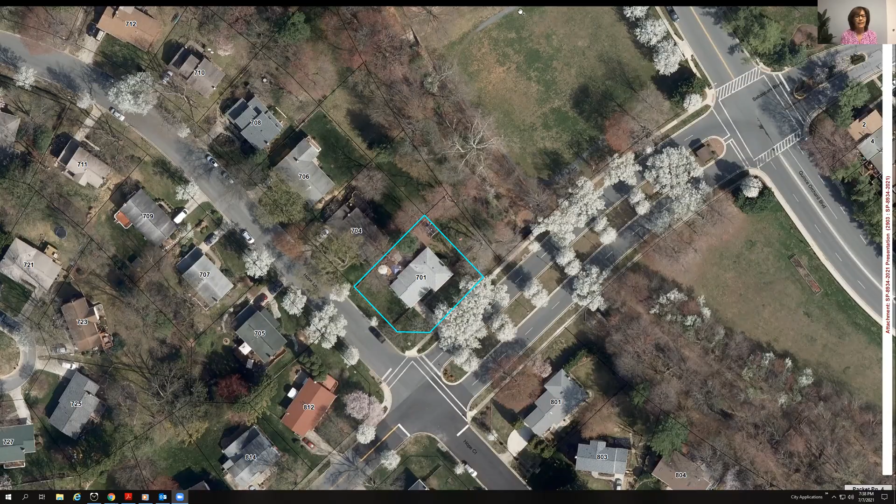And because the applicant is increasing the number of stories on the property. You can see on the aerial, this is a corner lot. It's 701 Hope Lane, but it actually faces Diamond Drive, which is the 4-lane road with the trees. The applicants are adding a 690 square foot addition to the home. It is required under section 24-168A that this go to the Planning Commission because of the additional story to the structure. So the applicant, Ana Mirzaei of Manzel Construction, is here, I hope. I'll turn it over to her and let her introduce it.

Okay, great, thank you. I don't see her. Good afternoon, this is Gene Brown and Brooke Bernal. We're the homeowners. I know Anna's participating, but I don't see her right now. Okay, as Caroline said, first I'm going to say I'm Gene Brown, this is Brooke Bernal, the homeowners, and I want to thank you for your time this evening. I wanted to ask if everybody had the opportunity to look at the site plan documents that were presented.

Sure did. Perfect. As Caroline said, it's 690 square feet. Brooke and I've been here for 4 years, she's been here for about 10, and we have a full house. Quite honestly, she has 2 girls, 11 and 16, or 12 and 16, and my daughter is going to be moving in with us, who's 14 years old. So it's going to be quite full, which is what pushed the requirement of why we wanted to increase the living space of our house.

And primarily the decision had to do with, we love this neighborhood, we really do, and we didn't want to sell and go somewhere else. So the obvious answer was to request permission to add a story to our current split level home, which would be adding a master bathroom, bedroom, small laundry room, closet space, and office space.

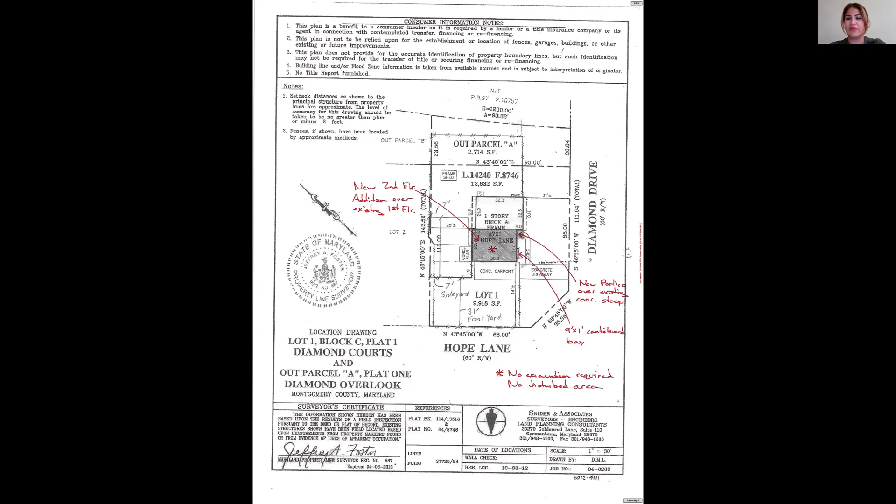And you want to go to the next page? Go ahead and go through the presentation as you describe this, I know you've got some elevations and some plans to back that up. Yes, so if we can go to the next page.

So we can go to the next page. The addition spans throughout from the full front of the house to the back of the house, but not over the carport. So there will be windows on the side of the carport. I think that might be in the next slide that you can see there.

If you go to the next page, please. So you see in the front, what we've done to kind of keep with the style of the house is we're adding a little bump out in the front for the windows to make it more unified. And in the back, the windows are pretty minimal, just to allow for light, but to also provide privacy since it's going to be a master bedroom.

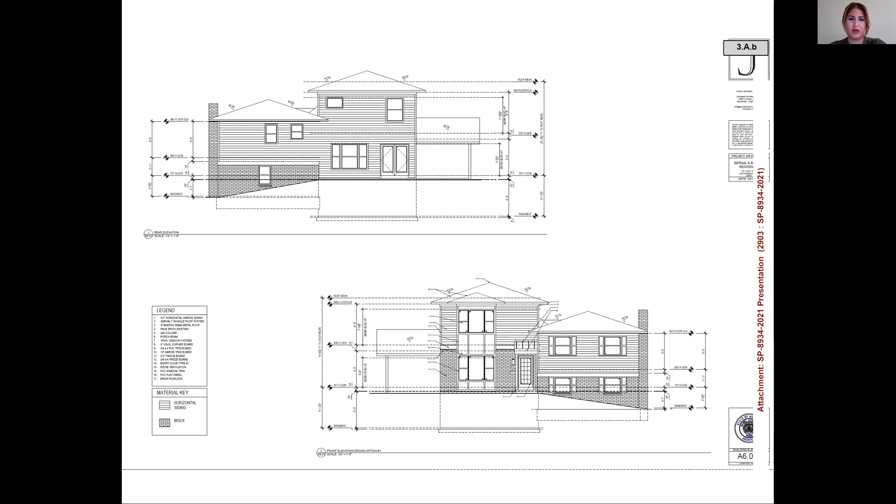On the next page, I believe you will see that there's 2 small windows on the side, and you can see where the existing pitch is for the roof of the carport. Next page.

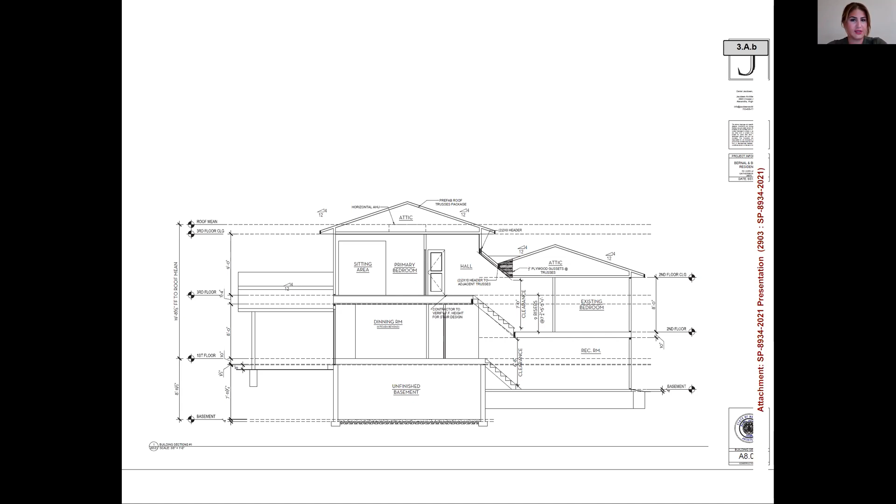Next slide. So you can see here that the average height of the house we're adding on is about 20 to 20 and a half feet to the roof mean.

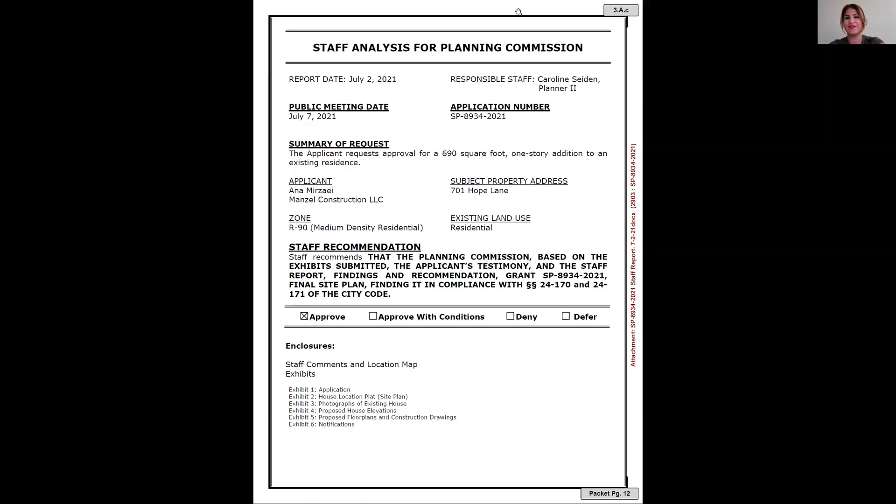Next, please. I think that's the last one. Okay, and that's all. It's a pretty standard sort of addition. Please let me know if you have any questions, either from me or from the homeowners. Is that it for the presentation? Anything else you wanted to present?

Just to give you an outline of how we do this: you presented the proposed project, we've read the staff analysis and the submittals with all the drawings, and we'll get questions from the commissioners if they have any. Then we'll ask if anyone in the public wants to comment or testify. We'll come back so you can answer any questions the public raised, and then we'll go to the staff recommendation and discussion. That's how this will play out.

So if you're done with your part of the presentation, at least for now, commissioners, any questions for the applicant? None? Okay, nothing, no hands rising.

All right, Chris, can I ask you to play the video about testifying, so that if anybody in the public wants to talk, they know what to do.

Your video appears to be on mute. Can you all hear the video? No, I can't. Chris, we cannot. Chris, we couldn't hear the video.

Good evening. If you've connected to the meeting tonight via Zoom on a desktop or laptop and wish to make a public comment, we can't currently see or hear you. Please wiggle your mouse and look toward the bottom center of your screen. You should see a raise hand button—go ahead and click on that now. Alternatively, if you've connected in via telephone, you can press star nine.

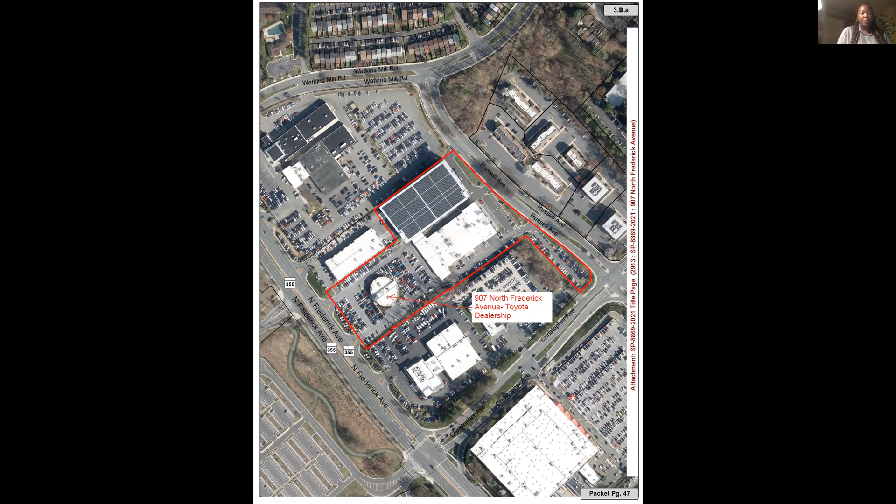Jasmine, while transitioning to the presentation, I must have misread the application. Is there an ENV application to go with this site plan? Yes, it's ENV-8963-2021, it's an amendment. Are we doing a second motion potentially for that, or is it folded into the actual site plan? It'll be folded into the motion for the site plan.

Okay, all right, thanks. All right, so this is my first virtual commission hearing, so forgive me, I'm going to do my best, but I have been before commission several times for this project. Thank you all for having me back. My name is Doug Tilley. I'm with O'Connell and Lawrence. We're the engineer on this project. This is for final site plan

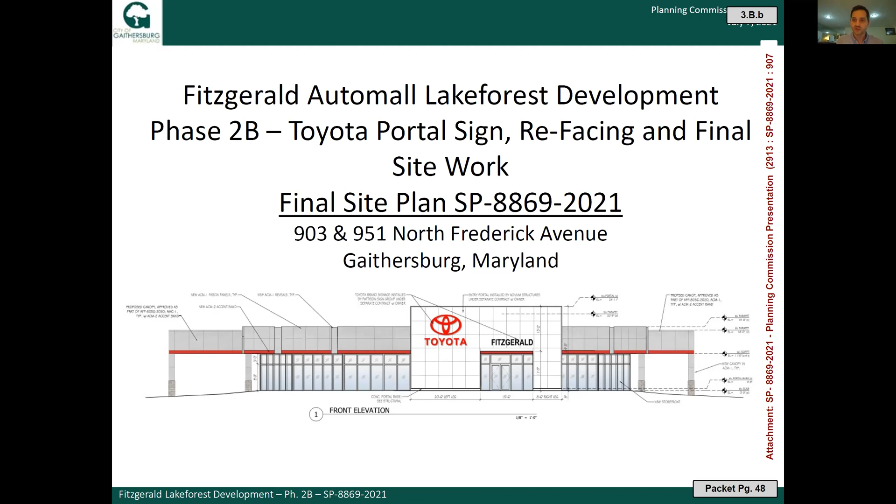SP-8869-2021. As Jasmine introduced, it's the final phase of a phased development. The project team, not everybody is here today, but presenting tonight is myself, Patrick Swift from Penney Design Group, who is the architect, and Mr. Steve Scobo from Novum Structures, LLC, who are the portal feature sign consultant on this project. We also have Chuck Miller from Porter Construction with us, available to answer questions, although he's not formally presenting as part of this.

There is a long history for this project. I've been before commission several times on this, going back to the original concept site plan, approved in 2016. We've had several final site plans for individual phases: the Hyundai Subaru refacing, the Panhandle parking lot area modification, removal of an existing pond area and replacement with an underground detention system and parking lot, the parking garage and site improvements, and then an AFP for the garage solar panels, approved in December 2017. There were also two final amendments to final plans approved in 2019 and 2020 respectively, for a retaining wall and for some side canopies installed adjacent to the Toyota showroom building, which is the subject of this hearing.

Some critical items about this particular part of the development: as Jasmine stated, this is essentially the closeout of concept site plan SP-7277-2016. It's the last of four significant phases. The overall limits of disturbance are approximately 32,000 square feet, divided into 6 separate areas, 5 of which are much smaller than the other one. The key points include installation of the portal sign feature and a front canopy that sits directly behind it and attaches to the building, refacing of the existing Toyota showroom building, which Patrick will talk about in more depth, various site improvements to improve accessibility and the general ability of customers to get in and around the facility, minor parking upgrades, final parking lot green space installation, final parking modifications and layout, final signage layout—meaning stop signs, on-site directional wayfinding signage—and the overall closeout of this site plan as previously mentioned.

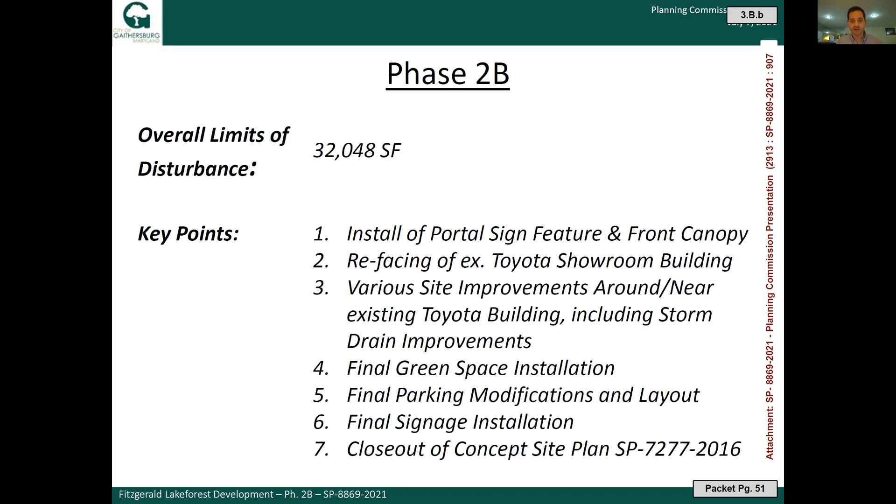So these are existing conditions as of this phase. The Toyota showroom faces Maryland 355, with a very limited amount of external demolition associated with this project. There's a light pole that's going to be removed because it will be in the new drive aisle. A certain number of parking spaces are being removed as part of this application and will be reallocated at certain locations around the site.

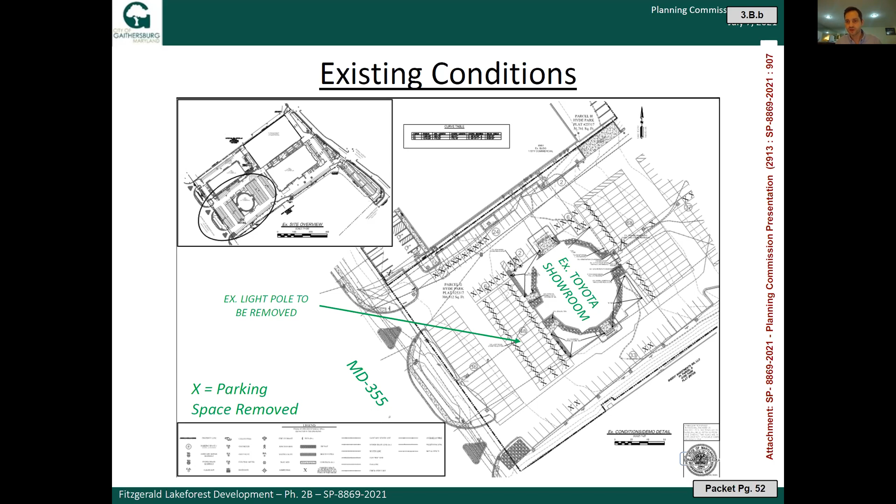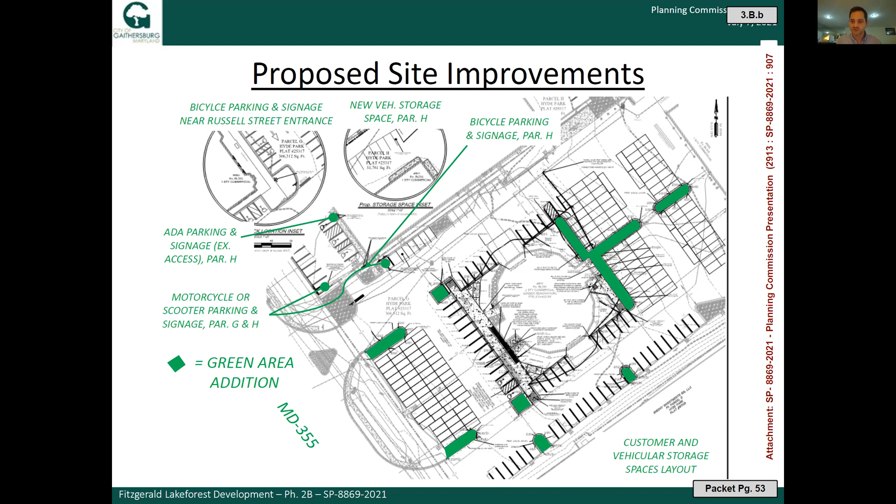These are proposed site improvements at a more macro level; we'll get closer to the Toyota facility in the next slide, but you can see the general scope of improvements here from a site perspective. Again, minor parking upgrades, the addition of bicycle parking and motorcycle/scooter parking, which was a requirement as part of the conceptual site plan. ADA parking improvements on both parcel H and parcel G. The Toyota facility is parcel G, and there are a couple of minor upgrades on parcel H, the location of the body shop. The hatched green areas show where parking lot green space is being added as parking islands as part of this application. Certain green spaces have already been added to the site as we've progressed through the overall development of the project.

Next slide, please. So in the vicinity of the building, you can see more granularity to the actual improvements here. Bicycle parking and signage at the face of the building, a new light pole outside the face as well, and significantly improved access sidewalk in front of the customer spaces out front of the building. The portal sign is in front of the building, shown as a dark shaded bar directly in front. Patrick and Steve will talk more about that sign feature specifically. This application is not for the sign itself; that's coming in a future application, but for the actual feature wall. There's also ADA parking and signage with access improvements at the bottom left of the slide, just in front of the revamped facility. A rear stairwell coming off the backside, improved concrete access walk for access to the building on the rear, and storm drain connections from the building drains to the existing concrete storm drain that travels along the drive aisle just north of the facility.

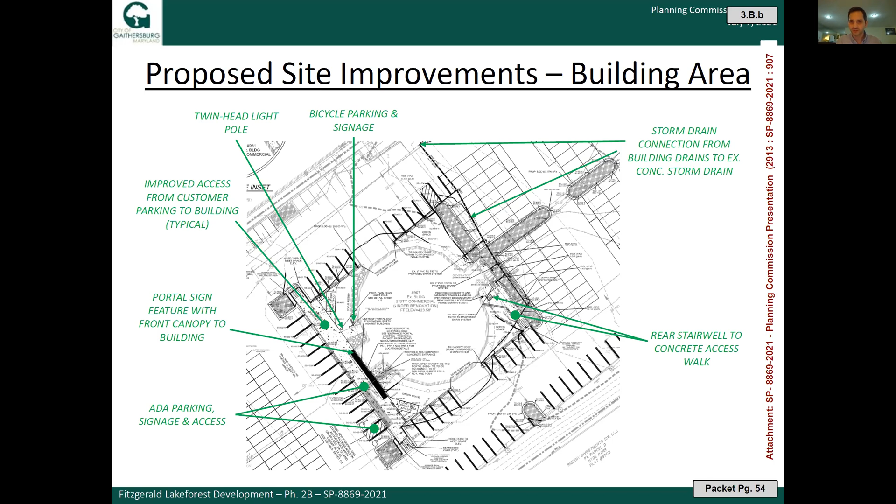Next slide, please. There's also a request for a modification to existing ENV 7422-2016, the forest conservation approval that has existed for this project. The scope of that approval is simply reallocation of trees from certain locations to others, in conjunction with the modification to the location of the parking islands. Now that the parking islands have been moved as part of a previous amendment to the final plan, this cleans things up so we have a clear location of the trees within those parking islands, or modifies them to another location on site where they fit better. There's no change in the number of trees -- it's simply a reallocation on site.

And with that, I am going to turn this over to Patrick Swift of Penney Design Group, who is the project architect.

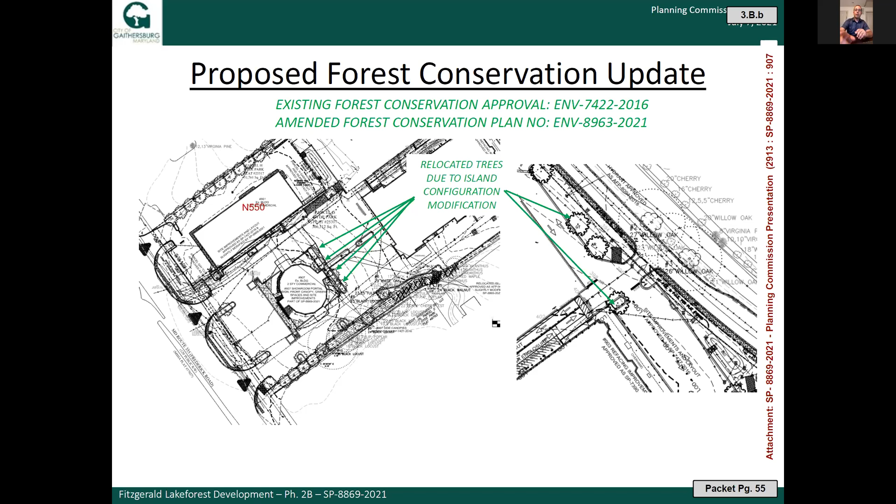Thank you, Doug. Good evening, everybody. This is my first time presenting to the city of Gaithersburg, so it's a pleasure to be here. As Doug mentioned, there's a lot more site work going on in this particular application that we're talking about today. But if you can click through to the next slide, please.

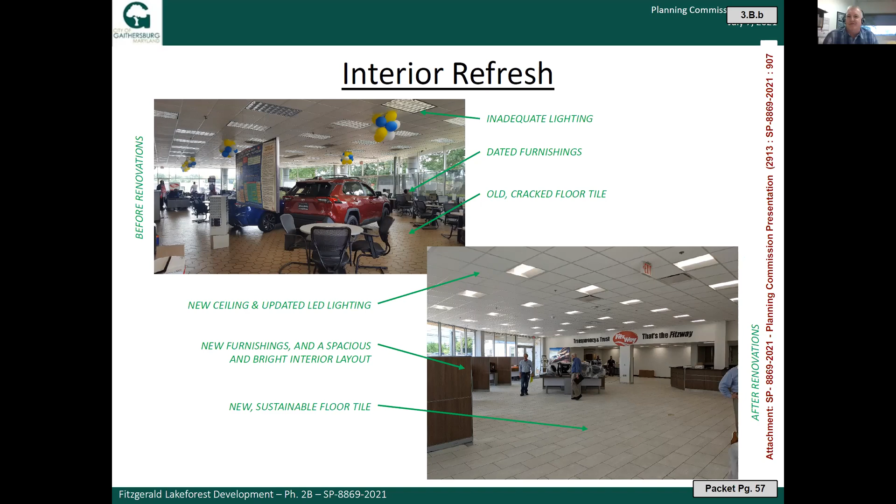Great, thank you, Patrick. Next slide, please. Again, I'm Steve Scobo with a company called Novum Structures. Thank you for the opportunity to be here this evening. We've had the pleasure of working with Toyota as one of their certified providers since about 2005.

Our sole purpose is to support their national brand image by incorporating standard components while working with the local dealer, architect, and design team to provide proportional and aesthetically pleasing applications for each portal execution nationally. Each of our systems is fully engineered to local standards and contains similar structural steel framing, aluminum cladding, light diffusing glass, and an internal LED system.

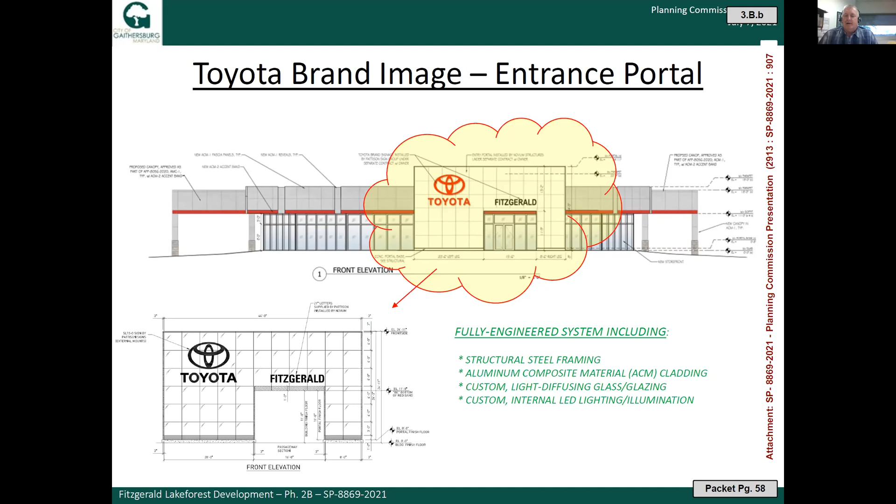Next slide, please. These next two slides give a more detailed look at the materials. The steel trusses provide a uniform depth of our system, in accordance with Toyota's brand image. The perimeter white ACM cladding gives it a clean finish on the exterior. And we use a custom light diffusing glass on both the front and back side for a couple of reasons, which we'll get to.

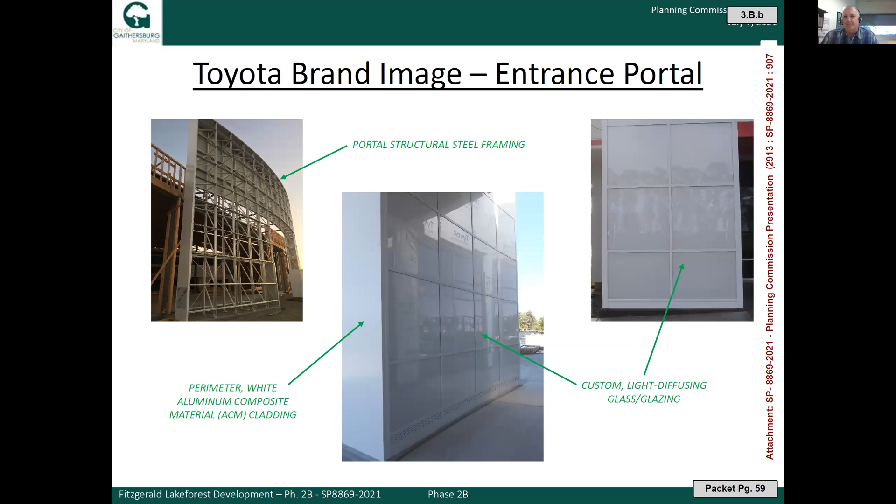Next slide, please. That custom glass actually provides a very aesthetically pleasing textured daytime appearance, but more importantly, it works with the lighting system to uniformly distribute the light that comes out of the portal with the custom LED system. Both the lights and the glass are custom engineered for Toyota for this purpose.

As you can see in the photo on the left, the LED system is an indirect cutoff and shielded system, to minimize any light spill from the portal element, and it provides a very uniform appearance in the evening. Doug's got a photo we'll show you a little later in the presentation to give you the overall look. So in a nutshell, that's Portal 101 as fast as I can go through it. Next slide, and I'll throw it back to Doug.

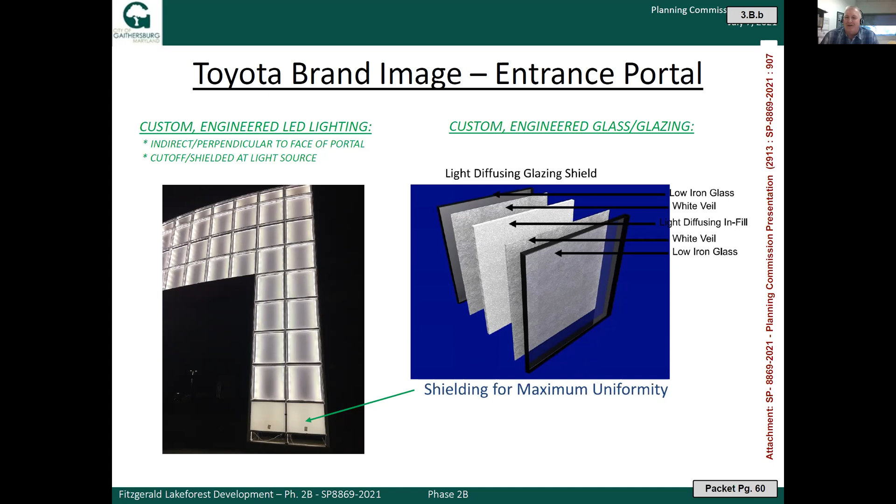Thanks, Steve. So in closing, these are the upgrades that are proposed now. You can see on this slide, I had OC&L staff go to a number of different Toyota dealerships in the vicinity of the city, to give the commissioners a flavor of what they can expect to see on site when they move forward.

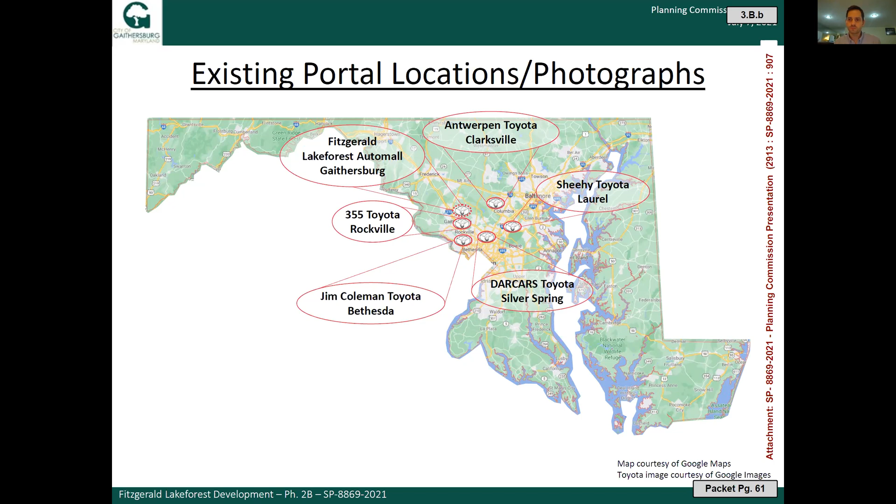So you can see we visited Antwerpen in Clarksville, 355 in Rockville, Jim Coleman in Bethesda, DARCARS, and Sheehy—a number of other Toyota dealers in the vicinity of the city. Next slide, please. These are photos taken by my staff, but you can see the portal itself is not necessarily uniform across individual sites. It's custom to fit individual sites, which is the case here as well. Next slide, please.

Next slide. And with that, the whole project team and I would very much like to appreciate the ability to present to you tonight. We are happy to answer any questions the commission has. Thank you so much. Great, thank you.

So in the particular application of this portal element on the building, is the piece freestanding or is it anchored to the building? Some of the examples looked like it was freestanding, almost like a sign, almost like a billboard out in front of the building.

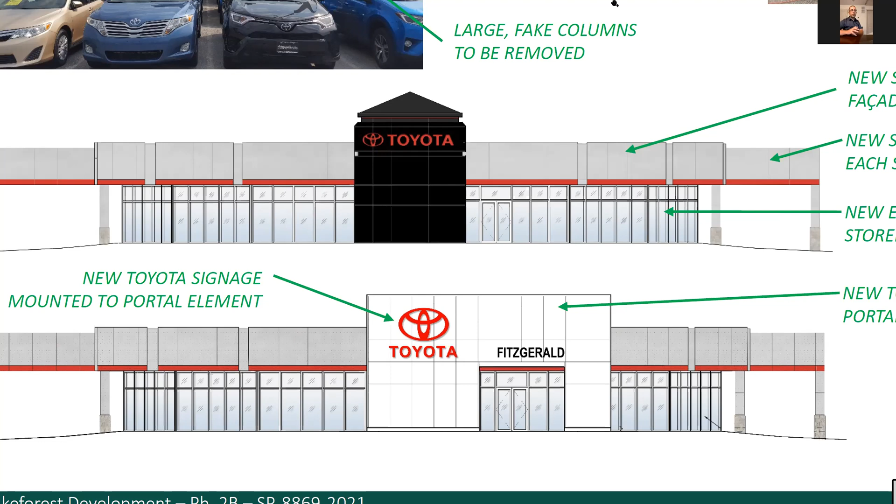John Bauer, I did want to address a question you had a few moments ago. I was able to look it up while we've been talking about other things. The height of the formerly existing black pyramid roof on the front volume of the building was just shy of 29 feet, about 28 foot 10. The top of the new portal is 24 foot 11, so we're a good 4 feet lower in height.

Okay, thanks for that clarification. Appreciate that. All right, commissioners, any other discussion on this application?

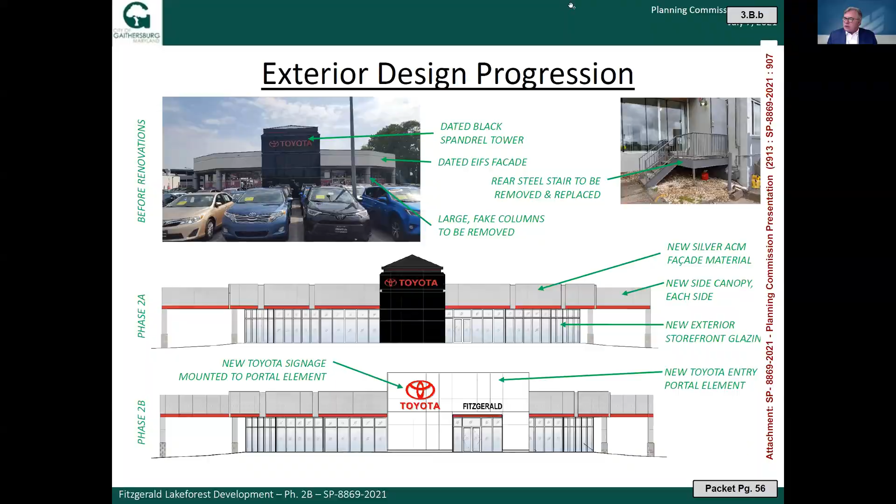Let me back into one other point—Jasmine, help me with this. The environmental application, let's make sure we're clear about what that's for. Back in 2016, when Fitzgerald came before the commission for the concept site plan, there was an environmental site plan approved outlining how many trees would be planted for reforestation, and I noted they did a fee in lieu as part of that forest conservation. Now this amendment is just relocating where the trees are located, because of the parking lot island reconfiguration. They're just showing the new location of the trees.

Okay, commissioners, any concerns with that proposal? No? Okay, seeing nothing there.

All right, and now to the facade improvements and some incidental site improvements—certainly the facade is the biggest piece. Any concerns with moving forward on this renovation proposal? No, mostly shaking heads. Okay.

All right, then I think with that I'll leave my signage and the definition of sign and building to the side for now, and ask if there's a motion, please. Could you remind us what the change was in the staff recommendation that you noted at the beginning? Instead of section 24-212, it'll be 24-171.

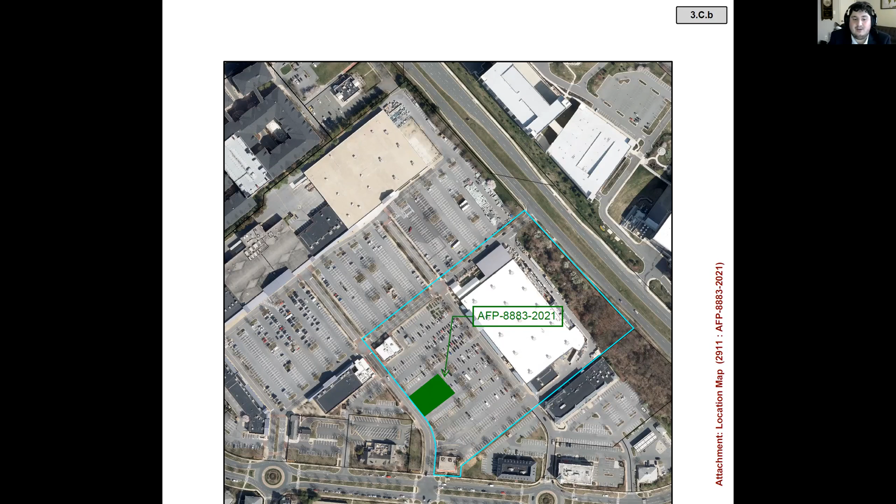Here tonight to present the application is Mr. Gary Underberg from Rogers Consulting. Thanks, Chris. Good evening, Gary. Good evening. Gary Underberg with Rogers Consulting. And actually, Vince Burke with Saul Centers is going to do the introductions. I'll come back and walk through the plan. Okay, great. Thanks.

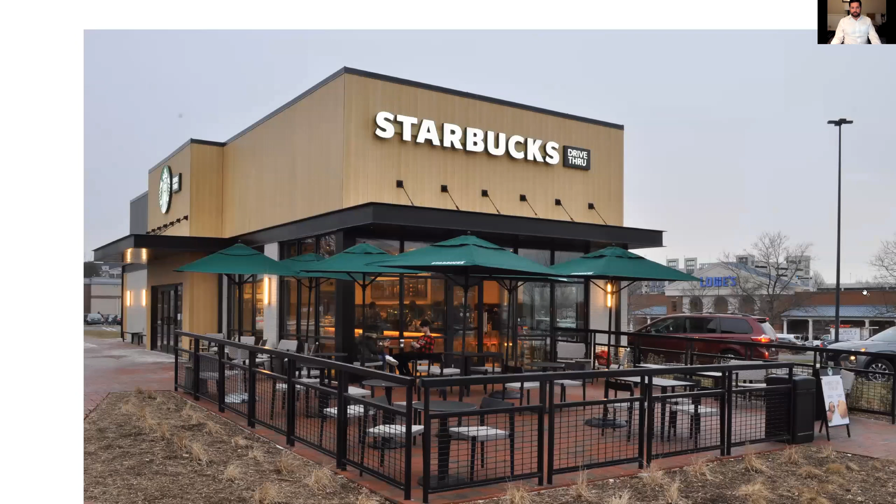And I've heard, and hopefully it remains true, that the city is pleased with it. And we think that the Shake Shack will be a nice complement to this building and help build out the vision that we worked on with you all and helping frame that streetscape and increase the walkability here. It remains consistent with the design guidelines. We're excited to add Shake Shack to the center. We know there'll be a good fit and do a great business here, and think that the community will be happy with their quality offering.

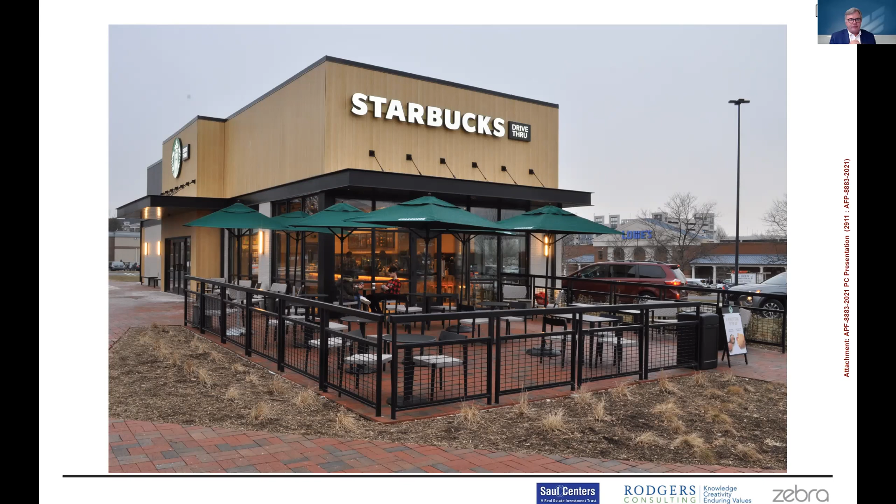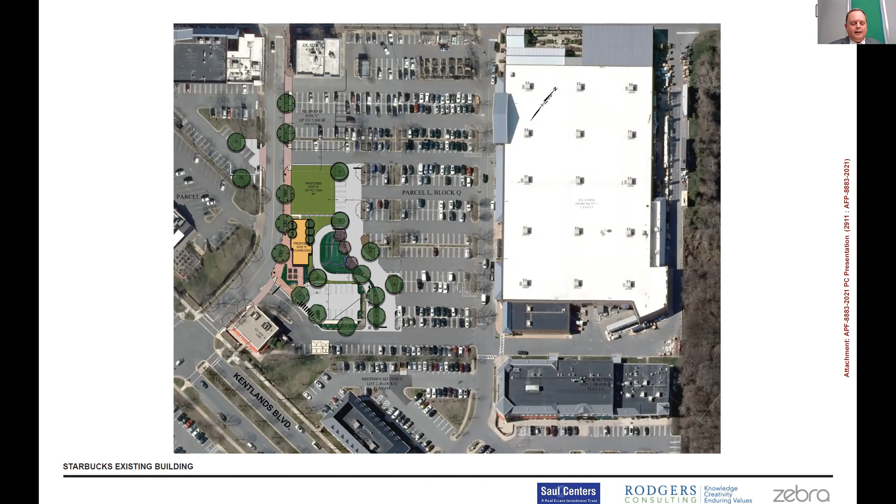What this did do was leave a green, roughly a square area, just north of the Starbucks building, and that's what we're talking about tonight. All this site work has been done. And with that, let's go to the next slide.

I do want to point out one difference we've been working with: there is a 3-foot grade change from left to right. Kentlands Square Place is about 3 foot higher than the parking lot, and everything slopes from left to right. With Starbucks, we were able to have a level building pad, and the grade was picked up through the drive-through and the stormwater pond. With Shake Shack, we are picking up the grade inside the building, a 3-foot difference, so Starbucks is about 3 foot higher than the Shake Shack pad, matching the parking on the right-hand side.

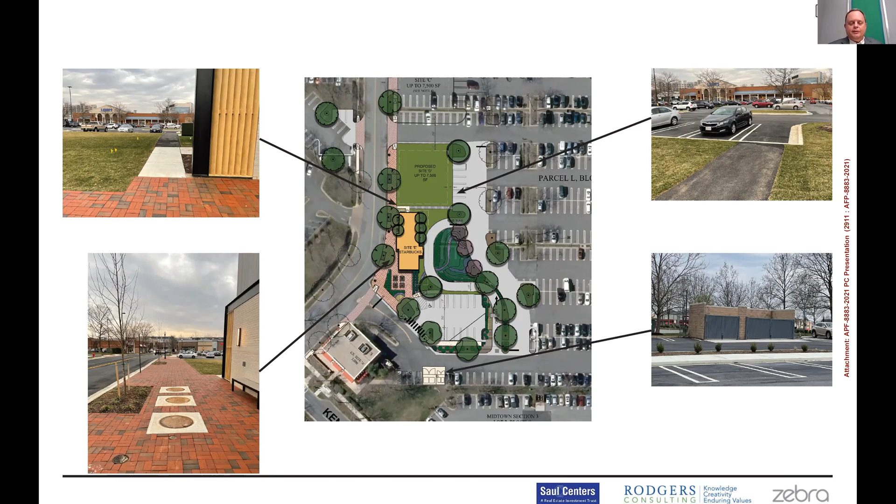You'll hear about a pickup window. There's no drive-through, but we do have 4 spaces for pickup, and there's a separate pickup window in addition to the outdoor seating. Let's go to the next slide.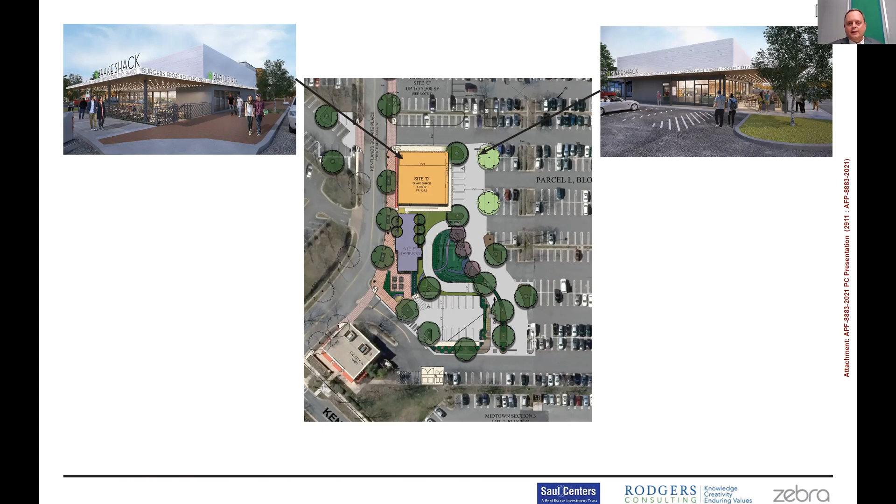So next slide. With that, I'm going to turn it over to Kelsey and let her introduce herself with Zebra, who are the architects with Shake Shack.

Okay, great, thank you. Sure, thanks, Gary. Hi, everyone. My name is Kelsey Ahumada, and like Gary said, we are the architect for Shake Shack.

To address this east elevation, I'm going to talk through a couple things, but the first thing that's pretty obvious in the elevation that I want to point out is how the finished floor of Shake Shack is 3 feet lower than the adjacent Starbucks. So you'll see on the left of the screen, we kind of white-boxed the adjacent Starbucks and are starting to highlight how we manage those grade changes.

So like Gary alluded to, we ended up closing off this sidewalk in between the two buildings for a couple reasons. Operationally, we obviously did not want to unload onto Kentlands Square Place, and for Shake Shack it's a lot easier, more feasible, and less disruptive if we unload from the front entry side, which is the east elevation that you see here. The gray portion at the bottom left of the building is actually the back side of the retaining wall that you see, but this serves as a sidewalk to our back of house doors to be able to receive shipments.

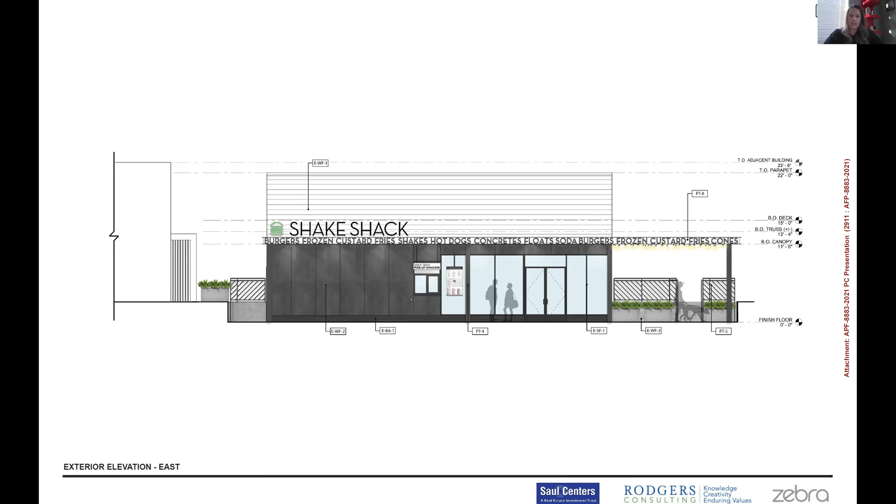We'll talk more about some of the finishes at the patio and the underside of the canopy once we can get a visual on that. So if you can move to the next slide, please.

Here, what I want to point out is someone facing the building is actually not going to see this angle that leads up from the entry up to Kentlands Square Place. This is just showing the grade difference between the two. So someone standing on the sidewalk adjacent to this railing is actually going to be able to look down into the patio - just wanted to call that out.

Another thing to point out on this slide is how we're maximizing the storefront. All this will be visible into the dining room, maximizing planters and real plants out there. And we have string lights.

One thing to note as we're starting to move around the building is the sign band that you alluded to, what we call the band of letters. That's exactly what it is - it's a C channel that has an LED tape light that uplights the words and lettering, and again, that's just very brand specific.

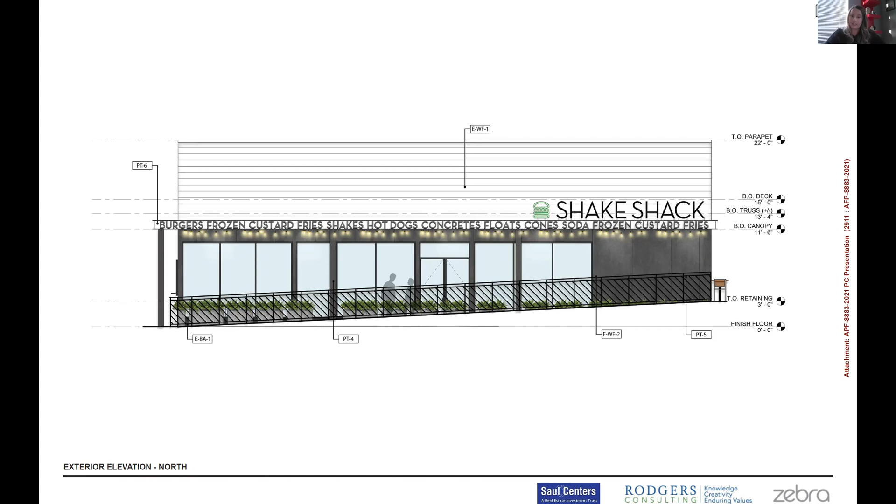Here is the south elevation, which faces the Starbucks. You'll see the grade change, but someone standing in the built environment won't be looking at a white triangle. If you're on the top left side, you'll lean over the railing and see the three feet below grade, which is where our back of house access doors are. The shaded person on the right shows where people will enter with dollies, and this also provides at-grade egress for people inside.

Also on this elevation, which I didn't point out on the other, is the small canopy that hangs over on the right side at the entry—just a small overhang that provides cover to the walk-up window and the entry doors. Next slide, please.

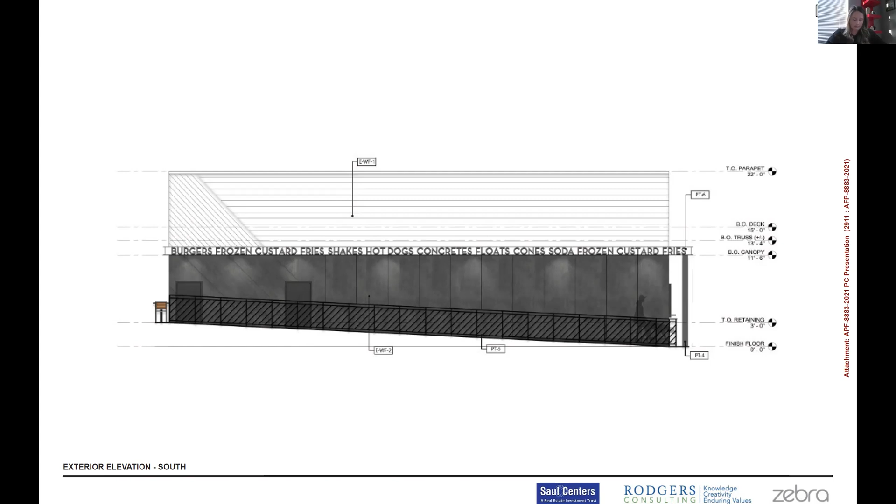This is our elevation on Kentlands Square Place. You'll see how we white-boxed the Starbucks adjacent to it, and how we're proposing to close off the access between Starbucks and Shake Shack. We don't want to encourage pedestrian traffic, but we also don't want one big nasty wall hiding everything behind it.

So we're extending the railing. We need to do so because of the grade change at the sidewalk, but the planter is at grade and matches grade with Starbucks, which is a better way of closing off that access and preventing pedestrians from going through there without doing so with such a heavy hand.

Another thing to note on this elevation is that we've added a few seating tables out here to improve pedestrian access and involvement. You'll also see we have patio access through a set of stairs down into the patio. So someone coming to Shake Shack can either come down the patio and into the building from Kentlands Square Place, or walk around to the main entry—both options are available.

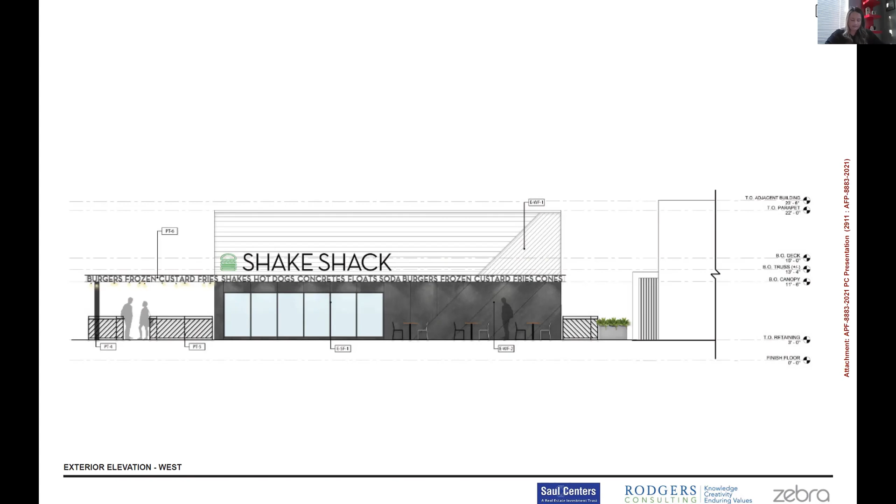We started to rotate some of our materials to provide a bit of visual interest. This corner is the one you'll see driving up Kentlands Square Place before you turn right into the parking lot. Next slide.

Touching more intricately on the materials, you can see our screenshots here showing the painted shiplap and the large format tile. We're going to have a separate tile base going on the exterior of the building. Then there's the wood cladding ceiling finish, which again is in compliance with the design guidelines—not a fake finish, painted, stained, all of that. We also started to show the Kawneer storefront, calling out that its color is going to match our large format tile.

Looking at the retaining wall, we want to propose a board-form textured feel rather than just a clean face of poured concrete. We're also calling out some of the paint colors on the exterior—mainly painting the band of letters, some of the columns, and the string lights. You can see a small image of how the LED tape light lights up those band of letters, and we're also showing the recessed can light we're going to use on the overhang.

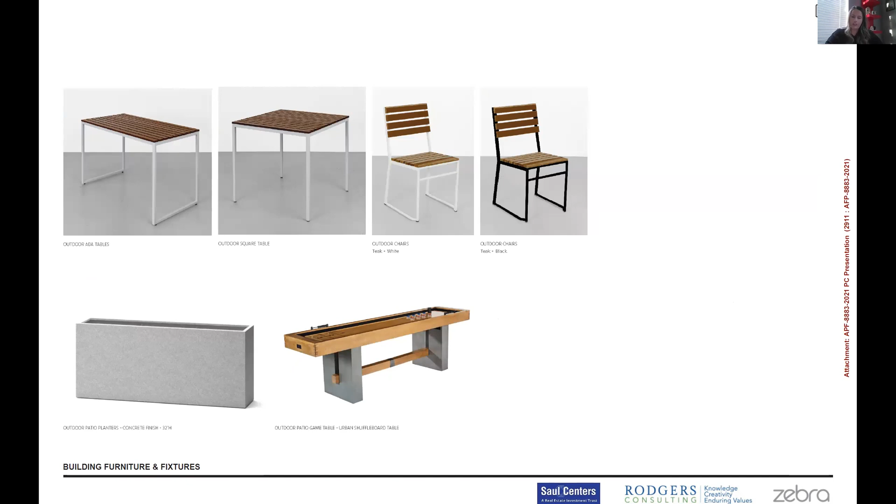This slide we won't spend much time on—just talking about the furniture package going out on the patio, calling out the planter, and we're also proposing a shuffleboard table out there on the patio as well. Next slide, please.

This is the rendering at the entry of the Shake Shack, trying to show the texture of the wood cladding on top, the smoothness of the large format tile, how people will interact with that walk-up window. And then obviously one huge call out is the transparency, how we want to keep it as transparent as possible, so that visibility is continuous, and then also viewing into the patio seating, the ample outdoor seating.

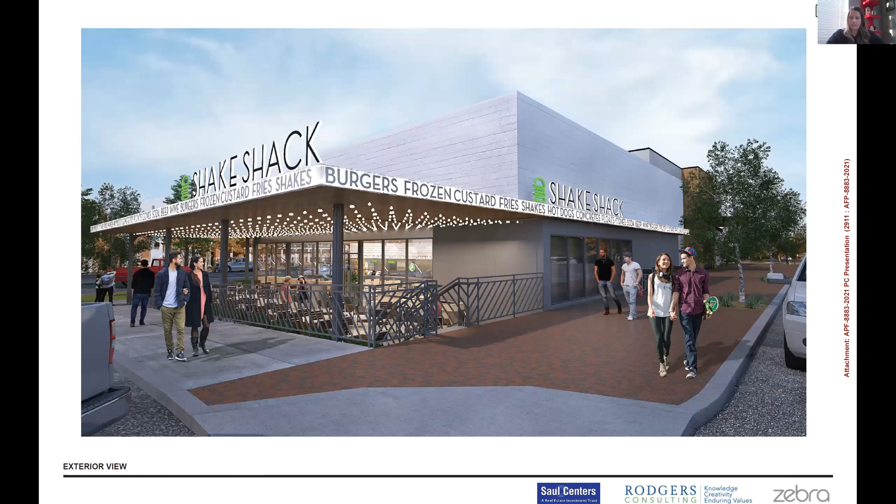Next slide please. And here's the shot from Kentlands Square Place. You'll see access down into the patio through those stairs. You'll see the overhang for the patio really starts to play with human proportion a little here, very interactive with the string lights, also with the uplights at the C channel and the band of letters. And then again, where you can kind of see the storefront and then the tables along this access as well.

So that concludes our presentation. I'll open it up to questions or clarifications.

Great, thank you very much. Well done presentation. It's a really nice way to show off the building.

I did have one fundamental planning decision question. Why did you all create the floor level at the back side of the site and not on what you now call Kentlands Square Place side? In other words, engage the street as opposed to engaging the parking lot behind. What was the decision making in that?

I'll take a stab at that, but part of that decision making is we did look at the pickup window concept and wanted the restaurant to be the same level as the parking lot. And then we also looked at handicap access with the handicap spaces on the parking lot side, so we could provide handicap access to the store itself. So that's somewhat what drove that decision.

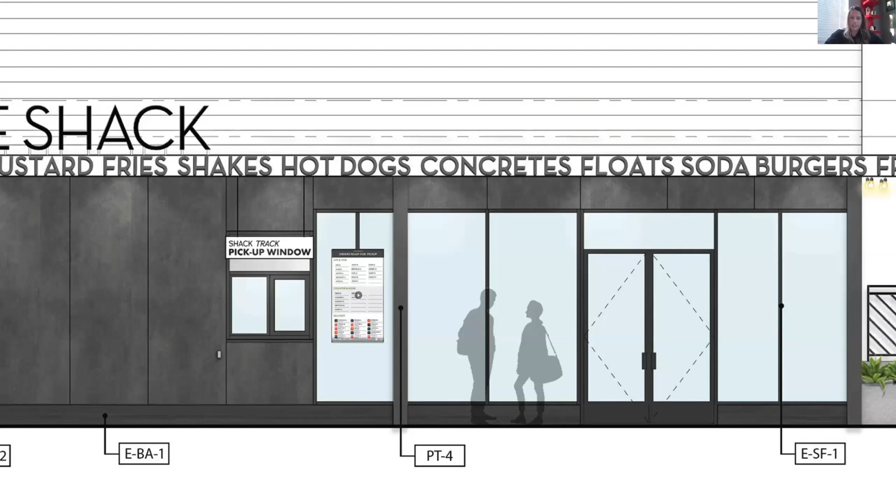Sure, maybe we can pull up the rendering - I think it's actually page 139. We do actually have an overhang from the canopy that does provide shelter at that walk-up window.

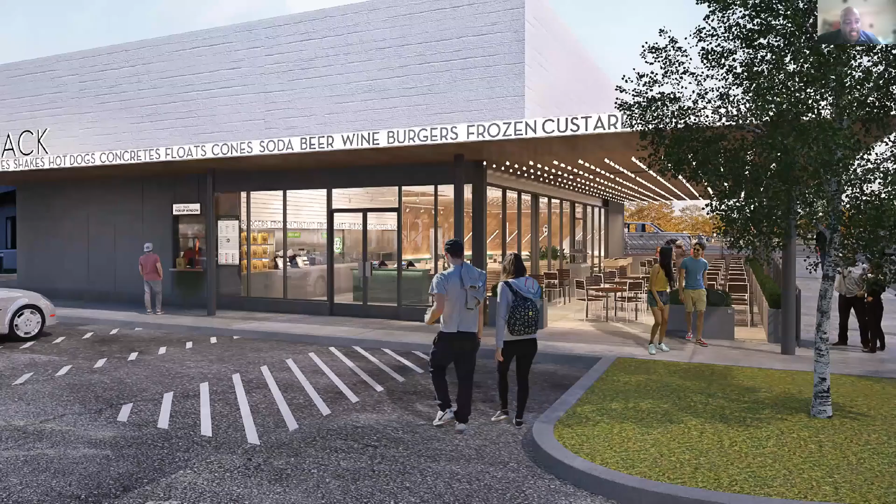Oh okay, we're just not seeing it on the 2-dimensional rendering here. But yeah, I like the idea of the walk-up window, considering we want the Kentlands to remain walkable. Okay, thank you, great, yep, good, thank you, no problem, okay.

Any other questions, Matt, Sharon, anything for the applicant's team? I have a comment, some discussion, but no questions.

Real quick, the parking that's up next to the walk-up window - do you envision people just picking up their food and driving away? Are they going to be dining in, and is there a time limit? How do you envision this? I think you said 4 spaces.

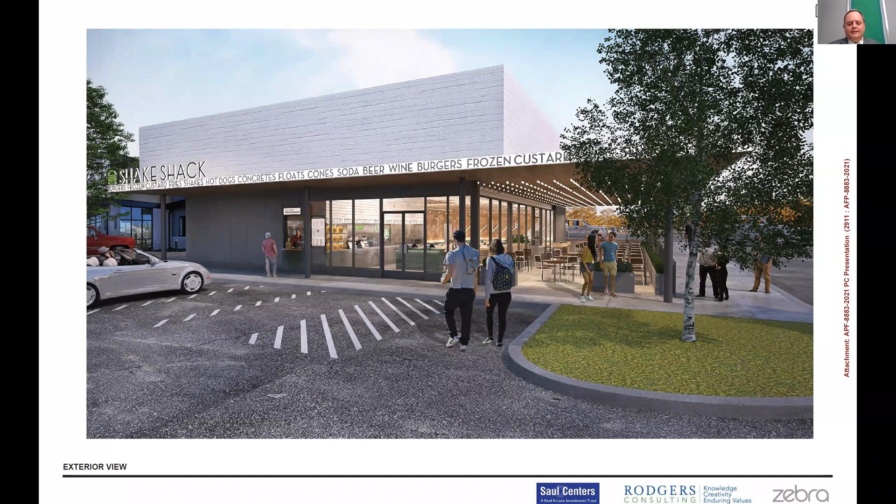Yeah, we have 4 spaces that are designated for pickup. And it's not in the rendering, but in the packet there are signs that show temporary parking pickup only. I think they had a 15-minute time period on them. So the intent is you pull in, walk up to the window, hopefully with your app you know when your food's ready, pick up your food and then leave. It's signed, and the intent is not to have somebody park there and eat their food, because in theory there are other people - Shake Shack wants to sell a lot of burgers and shakes. But you pick up your food and then leave.

I know Chick-fil-A had done something similar during COVID, where you just order and then leave, and they bring the food out to you because they don't have a drive-through either. It's a similar concept, but this does have dedicated spaces, whereas I think most of the Chick-fil-A's are doing it in the existing parking lots. Yeah, it's nice. Okay, thanks very much.

I'll add 2 more questions and then we can go to the public comment and the recommendation. The height of the building as shown in the renderings or elevations - I assume that represents a parapet that's hiding all of your mechanical equipment on the rooftop. Is that true? Yes, that's true.

In the packet, page 166, we do have some building sections that show how the parapet fully screens all that rooftop equipment. And I assume losing 3 feet on the Kentlands street side - I've got to get used to this name - you're losing 3 feet there, but that isn't compromising that viewing angle, I guess, so you've got plenty of height. Yes, correct, we kept that in mind.

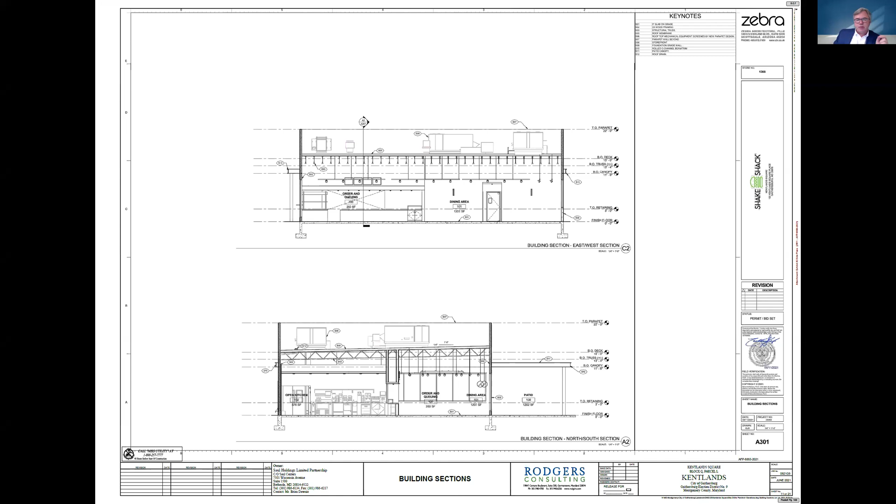Very good. Just to clarify, the slope from Kentlands Square Place to the sidewalk that would take you to the formal front door, which is the elevation facing back toward the parking lot - you said that's a 3-foot elevation change? Yes. And so you're picking all of it up in a straight slope, not needing to create any switchbacks or other conditions.

Correct. So the existing parking lot is roughly a 5% slope. So when you do all the math, the difference from the Kentlands Square Place to our existing parking spaces is 3 feet, and that walk along the connecting drive aisle is just under 5%. Okay, which meets the ADA codes and so forth.

Right, okay, very good. If there aren't any more questions for the applicant's team, I am going to formally ask if anyone in the audience is interested in commenting or testifying. But the queue to talk includes exactly one person - that's Z Norris - and I happen to know that's the tech team placeholder. So not seeing anyone, let me ask the tech team, if somebody is just dialing in and not watching via the video, would they show up in this list as well?

I would want to say yes, but there's no one that looks like they're in the queue right now. So I think, not seeing anyone able to access at this point, and therefore not really being able to comment, let's go ahead to the recommendation, and if somebody does jump in, we can acknowledge and offer them an opportunity if they do come in.

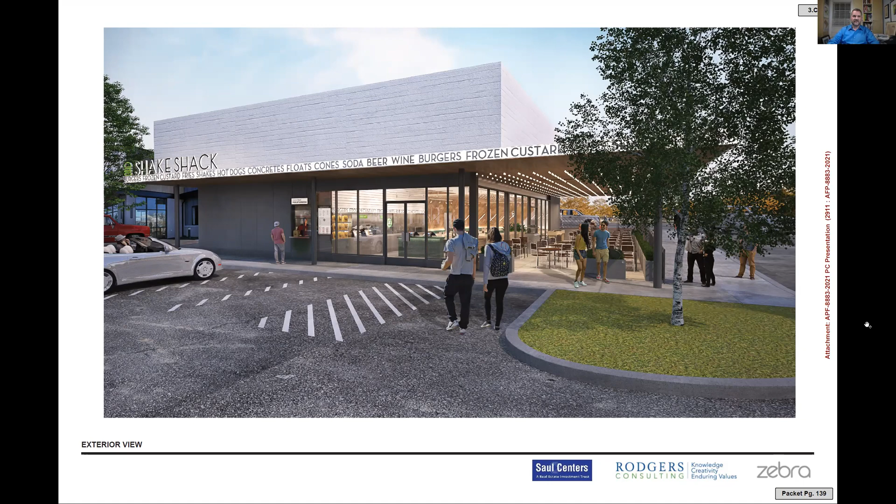I agree with your sort of analysis of simplified modern detailing. It makes this building unique within the property. It all works, but I think 3 individual lights, whether they're a can light, a little pin down light, or something that accentuates that wall and those tables there, would make it a little bit more exciting. The old traditional stuff we'd do in these urbanist things, and in Kentlands, which is big super graphics or fake windows or something like that, I agree doesn't meet your aesthetic, but I think some very clean, simple lighting solutions would work.

It could be ground lighting. There are a number of solutions there. And then I would also ask you to look and see if you can get the same 3-foot overhang on the rear that you can get on the front.

The little overhangs do great things for pedestrians as they come down the street—if it starts to drizzle, or if it's a little bit of sunblock. I know this is... no, this is west facing, right? So it probably doesn't block any sun, but it does a great deal for creating space, creating architecture, and treating that front door a little bit more like a front door.

So those are my thoughts, and I'm sorry to be prescriptive. Usually I lead you down the path, but it's already getting late, so I'm just going to give you my opinion.

No, great. I'd love to address a couple of those things. I know our floor plan is page 162, if we can pull that up.

First, I want to address the location of the stair, because I totally understand—we actually went through a couple iterations on that. What we wanted to do, hoping I can show you this on the screen if it'll help a little easier, is you'll see that the stair spits you directly down the aisle of the patio seating.

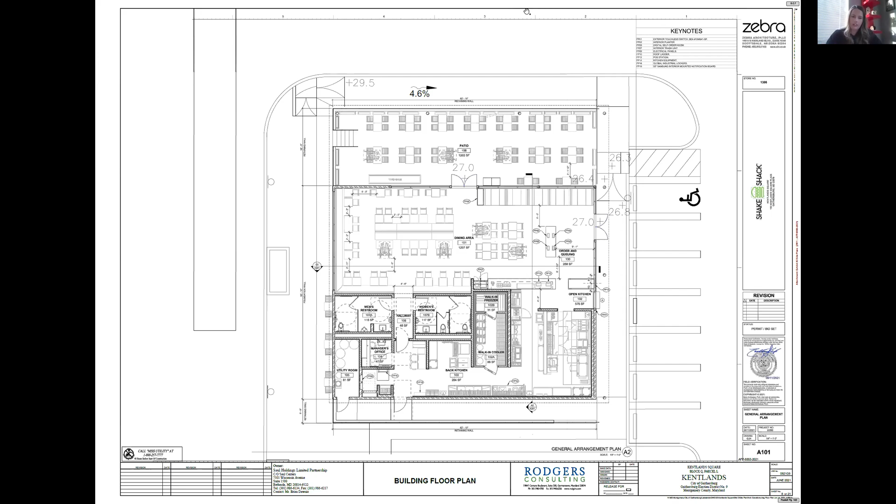And then your comment about the overhang on the Kentlands Square Place side—we can coordinate with Vince. I know we're right up against our limit line there, and what that overhang would do to our property itself, and all of those things, can be negotiated.

But definitely heard on the lighting. We actually did have an iteration where we added some sconces along that side of the building too. We started to pull back because of the human proportions out there—the bottom height of the C channel on that side is 8 feet, so putting a sconce below that, we were worried people would mess with it if it was any lower. But we can look at maybe some integrated lighting on the bottom side of the C channel to downlight that side. That's an easy add for sure.

Yeah, I think Matt did a much better job coming up with suggestions than I would have for the concerns we all share. I think washing that wall with light on both sides—for what it's worth, at least the renderings on the backside, where you've got a 3-foot canopy, don't show any light there either, which I'm sure you're going to want if your pickup window's there. So just lightening up that facade with some can lights or some integrated lighting, I think would do wonders.

And at least looking at the plan, I hear what you're saying about the stair. I think making it wider and shifting it closer to the building—you can reshuffle some tables and, at most, lose one table and still make it work. I think that's definitely worth putting some effort into.

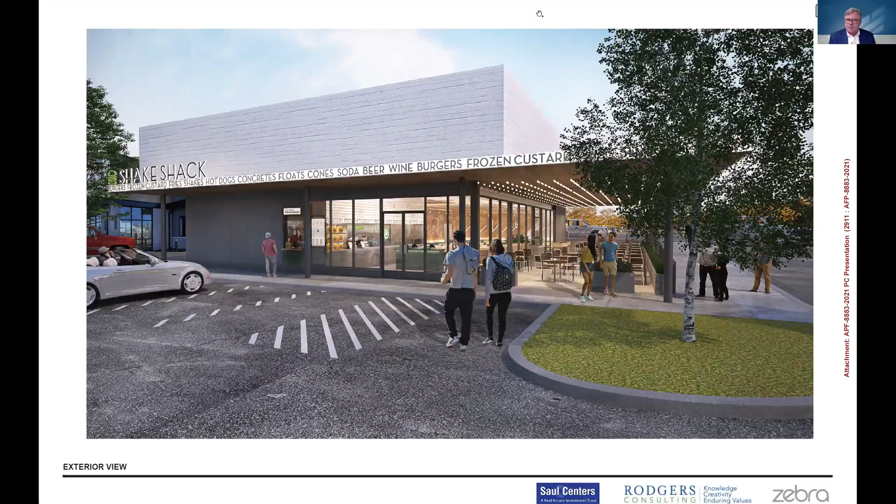No, great point. We did look at that too. Obviously, we had tried to avoid the spandrel, which was a solution Shake Shack didn't really want to proceed with, just because of all the power and all of the needs of that window on the service side. It was better used as a full wall where we could run power up it. But we can look at that. We can try to find a solution to integrate that a little bit more cleanly with the storefront. Maybe the storefront changes then to embrace the proportions of the window and what it has to be. I don't know. Somehow you make it all make sense together. You can always just put a wall behind the spandrel. It's invisible, it's opaque anyway.

Yeah, and I'm not jumping to a solution. What I'm getting at is just the idea of trying to create some kind of one nice cohesive treatment there that the pickup window doesn't interrupt.

All right, I'm tapped out with comments. I have to back up and say, overall though, really nice presentation. Thank you for doing it.

I see Vince's hand up, but you're on mute. Vince, you want to chime in? Yeah, I just was wondering, thank you. Kelsey, does that C channel project out already on the Kentlands Square Place side? Looked like it from the rendering, but I wasn't sure.

To Matt's comment. Yeah, it does slightly, pretty much the depth of the C channel. Okay, and Matt, you were looking for it to mirror the other side in terms of its depth, like human scale. Gary, staff, we're not leasing any space out there in the sidewalk. I don't see an issue with it. Of course, I'll take it back to our folks, but I think that would be fine with us.